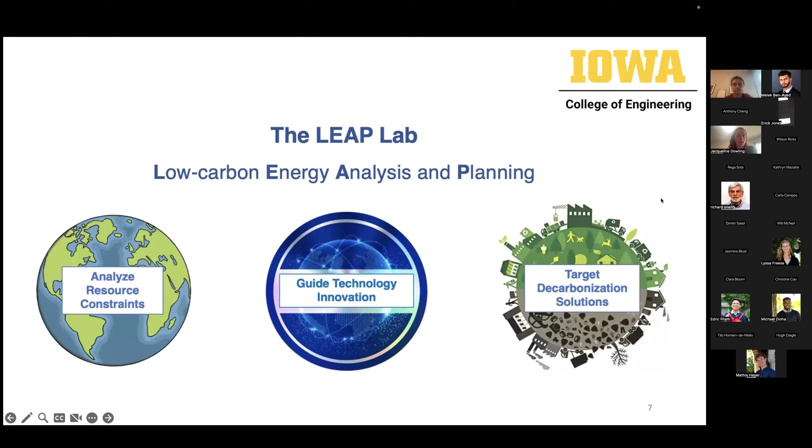I just like to say that I grew up in Iowa and I found my way back to Iowa after 10 years in California, and I'm really happy to be here at Iowa. So I lead the LEAP lab on low carbon energy analysis and planning, where we analyze natural resource constraints, guide technology innovation, and target decarbonization solutions. We've got a couple grad students joining, and if you're interested in the future, let me know.

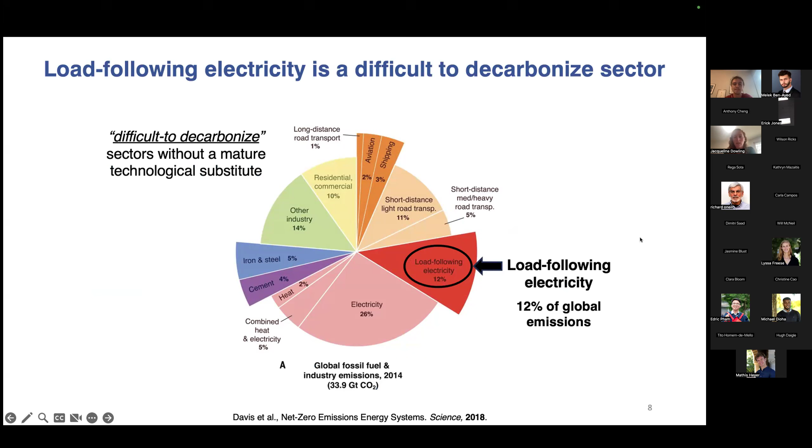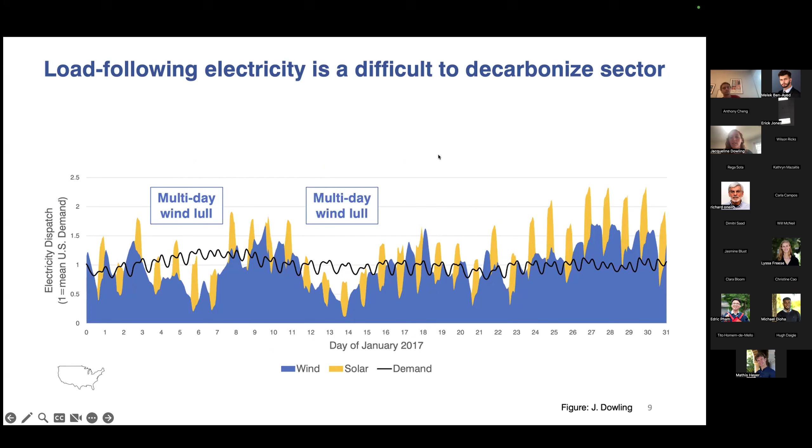So, load following electricity is a difficult to decarbonize sector, and it represents about 12% of global emissions, and it's kind of the focus of my talk today. Here I am showing wind, solar, and demand data for average across the continental US. And right away, you can see these two multi-day wind lulls, which are a challenge. But these wind and solar constraints give rise to opportunities for energy storage technologies such as multi-day energy storage to fill in for these multi-day wind lulls.

Additionally, you can have curtailed or wasted electricity beyond demand. And interestingly, this gives rise to opportunities for low efficiency energy storage to potentially soak up that need if it's cheap enough. So various wind and solar constraints include extreme weather years, droughts and seasonal lulls, and curtailed or wasted electricity. But these give rise to energy storage opportunities, such as multi-year and seasonal storage functional roles, large volumes of low-cost energy storage, and opportunities for low efficiency energy storage if it's low enough cost. I've published in all of these areas, but today I'll focus primarily on the energy storage story.

I want to say that various technology options may provide load following electricity. We'll hear from Wilson next about geothermal, which is a source of clean, firm power. Sector coupling can also help with load following electricity. But today we'll talk about long duration energy storage as one option from a menu of options.

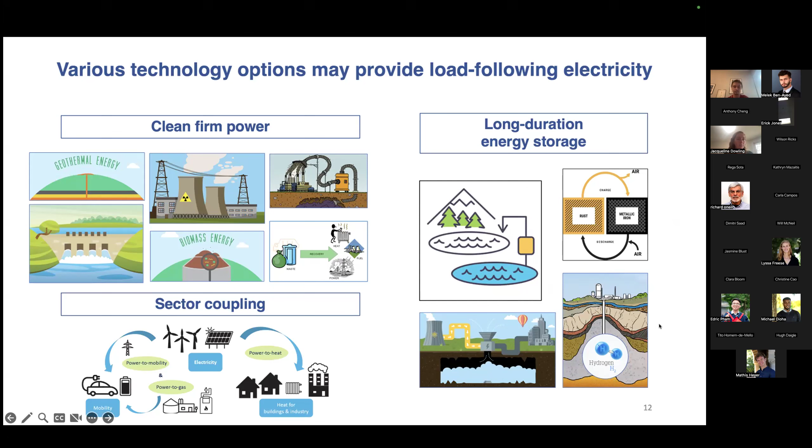I'm showing examples of long duration energy storage here, which include an iron air battery, like Form Energy's. There's compressed air energy storage, pumped hydro, and underground hydrogen storage as well. So we asked, at current technology cost, would long duration energy storage reduce the cost of reliable wind solar battery systems?

One example of long duration energy storage, as I mentioned, is underground hydrogen storage, where you can take excess wind and solar electricity, use it to split water into hydrogen and oxygen, store the hydrogen underground, and recombine it with oxygen in a fuel cell to meet electricity on demand. These two energy storage technologies both have charge steps, storage steps, and discharge steps, but importantly, they have opposite complementary cost structures,

where the long duration energy storage technologies typically have very low energy storage costs in this middle column, but higher charging and discharging costs. Just for comparison, lithium ion batteries are projected to get lower in 2050, but not orders of magnitude lower. This cost of $2 a kilowatt hour is far lower than the predicted 2050 costs of lithium ion batteries. And these costs are really what drive our results.

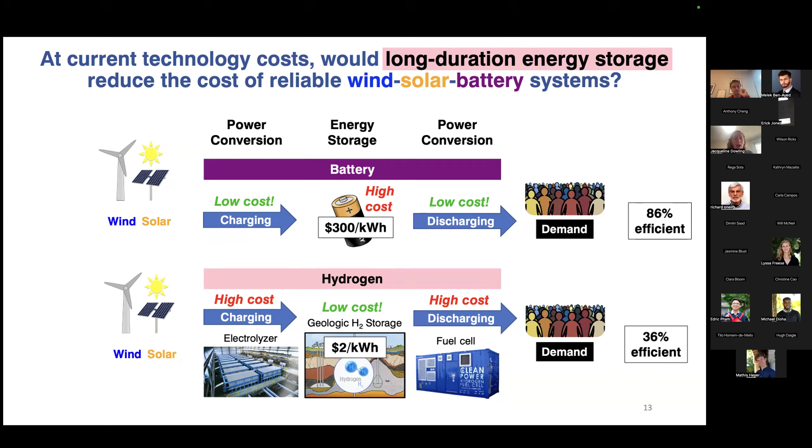Our priors going into this study were not that this underground hydrogen storage technology would be cost effective, because we saw the high charging and discharging costs, and we also saw the very low round trip efficiency, so we did not expect it to be present in the least cost system. However, we found it was. And it was primarily because of that very low energy storage capacity cost.

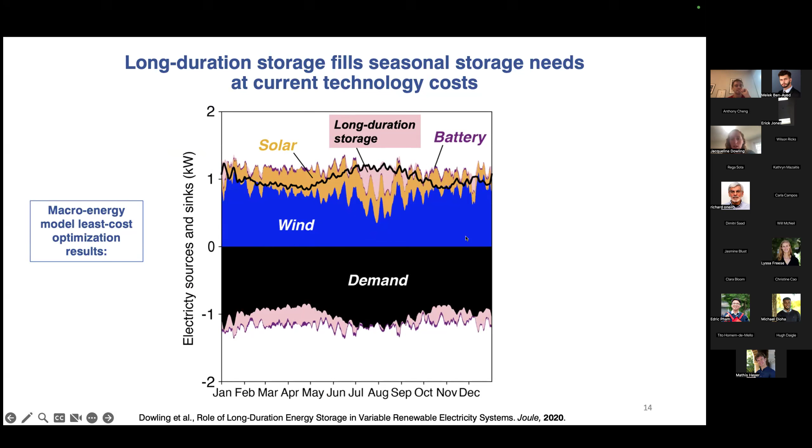So here you can see the excess wind and solar beyond demand charging up storage, and then discharging during a summertime lull in wind and solar. So this is a seasonal lull that the energy storage is filling in for there.

Additionally, we considered multi-decadal weather data sets because we wanted to understand the value of seasonal energy storage. And in order to understand the value of seasonal energy storage, you have to look at multiple seasons of weather data. That was typically not done by utilities and regulators, and so that was new. We looked at 1 year, 3 year, and 6 year horizons, and we found that reliable systems that plan for more years increasingly depend on long duration energy storage.

So here you can see the max storage capacity was about 10 days of mean US demand when solving the model for a single year, compared to closer to a month. Additionally, you can see multi-year energy storage being valuable, where energy storage is built up here over 3 years and then depleted during a scarce, stressful event later on.

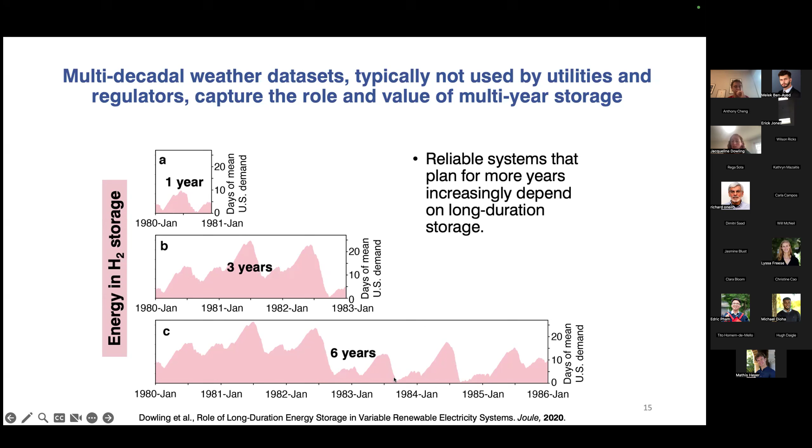So the key research advance here was twofold: we used multi-decadal weather data and we modeled an emerging technology. This paper is mainly cited for the simple fact that long duration energy storage can reduce the cost of reliable wind solar battery systems, and we bound that system by saying wind solar battery systems. It was cited in policy by Canadian and Australian governments, and that was really cool to see the work move from academia to practice.

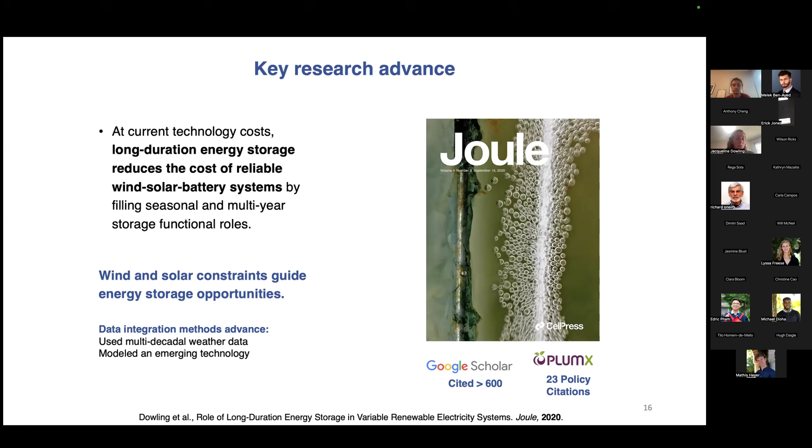Additionally, we looked at other energy storage options: redox flow batteries, pumped hydro, gravity storage, thermal compressed air energy storage, metal air batteries. And we found that geologic hydrogen storage and metal air batteries were the most cost-effective energy storage technologies, again, because of those really low energy capacity costs. So don't think of me as a hydrogen person. Think of me as someone who's focused on low energy storage capacity costs. Yeah.

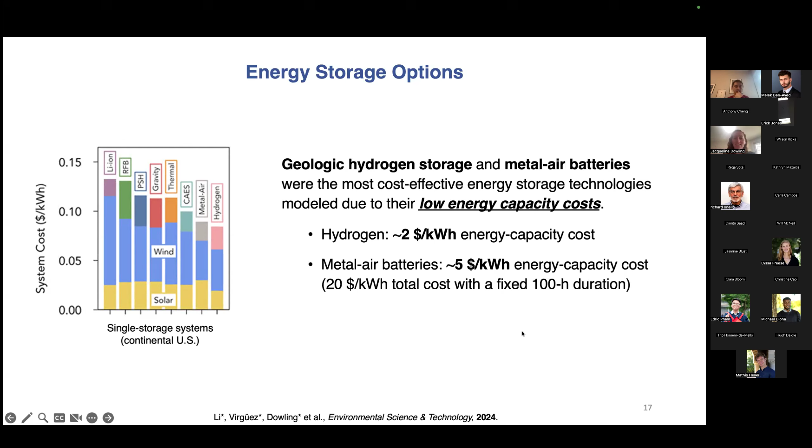But we did consider underground hydrogen storage in more detail because it is a promising example of long duration energy storage, and we looked at underground storage constraints specifically from natural gas infrastructure. We found that if you were to repurpose about half of the available natural gas storage facilities for pure hydrogen, that would be enough for national scale seasonal energy storage in some of our models. So there's ample capacity in existing natural gas infrastructure.

Additionally, you might be saying, well, all of your results are only looking at wind solar storage systems, and emissions are not allowed. But here we looked at systems where natural gas was allowed, but then it was increasingly constrained at different time periods or over time. And we found that underground hydrogen storage can reduce electricity costs in wind and solar systems when natural gas is restricted to about 17% of demand.

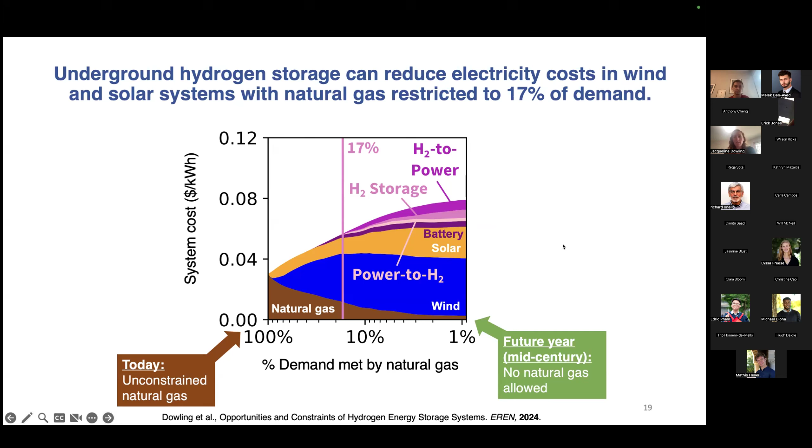So this means that long duration energy storage is really a deep decarbonization technology, and it's not competitive today while natural gas or other dispatchable sources of electricity are not constrained. So it's a deep decarbonization solution.

Next, we looked at the value of different innovations in underground hydrogen storage, including the value of capital cost improvements compared to the value of efficiency improvements. And we found that if you took our base case and looked at a theoretical improvement of round trip efficiency from today to 100%, the system cost would only decrease by about 7%. Whereas if capital costs were to be minimized all the way to zero, then system costs would decrease by 35%. So we found in this system that capital cost improvements were more valuable than efficiency improvements.

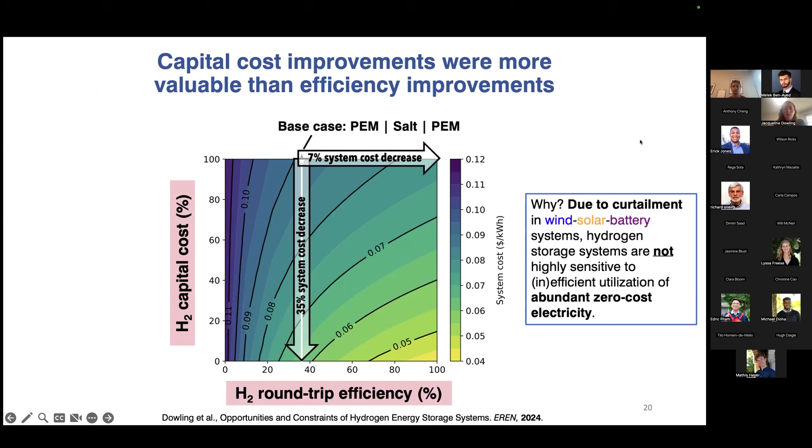And that's because we were looking at a wind solar battery system with a lot of curtailment. And the storage systems were not highly sensitive to inefficient utilization of abundant zero cost electricity. So that was the specific system we were looking at.

Additionally, we've looked at dirt cheap energy storage, thermal energy storage in dirt, which uses soil or rock to store energy at very, very low capital costs of 1 cent a kilowatt hour. So I mentioned $2 a kilowatt hour for underground hydrogen storage, about 5 to 10 to 20 for iron air batteries, and then lithium ion was on the order of 200 or $300 a kilowatt hour. This is so cheap in comparison.

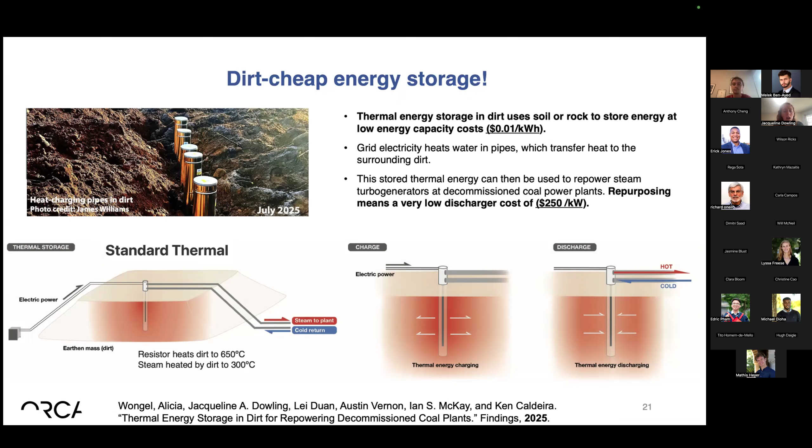And additionally, we considered thermal energy storage at decommissioned coal plants where you can repower the steam turbo generators. And this repurposing means that you can also take advantage of a very low discharger cost of about $250 a kilowatt. And that makes this energy storage technology incredibly cost effective. We found that it was competitive even without an emissions constraint in a wind, solar, gas storage, and oil system across the continental US.

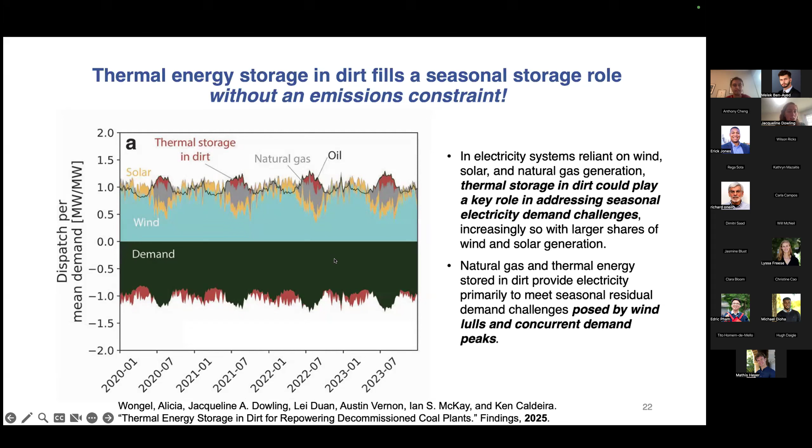So you can see that the thermal energy storage in dirt is not replacing all of the natural gas, but it's filling this seasonal energy storage role and meeting these challenging times where there are both wind lulls and demand peaks in those summer times. Yeah.

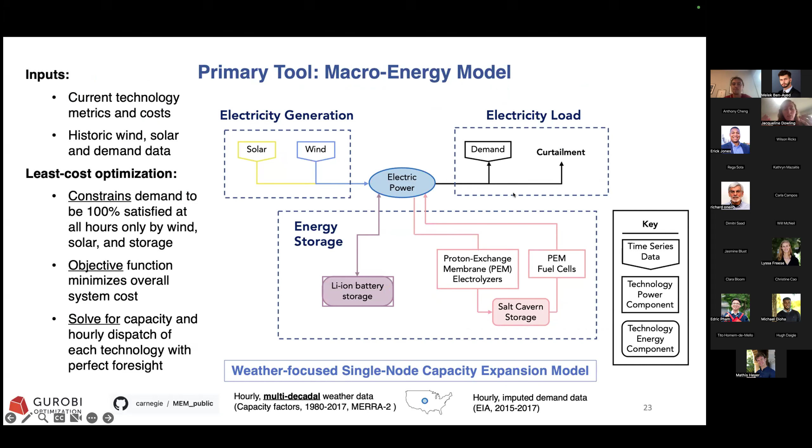So the primary tool that I have been using to discuss the previous papers that I mentioned is this macro energy model, which is a weather-focused single node capacity expansion model that is really useful for considering multiple decades of weather data. But now we're looking at multinodal sector-coupled modeling with spatial resolution in PyPSA-USA that's been developed at Stanford by Kamran and Trevor Barnes.

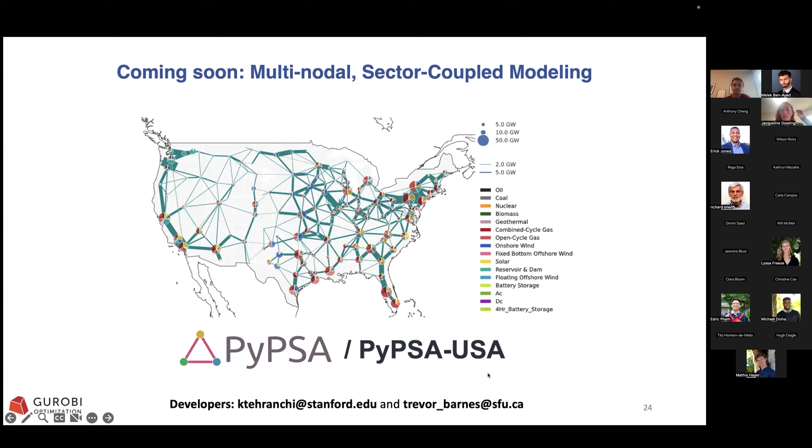And the first paper that I'm using PyPSA-USA to look at is asking this question of, is hydrogen still valuable for long duration energy storage in sector coupled energy systems? And what we found is that huge underground hydrogen storage was still valuable, but instead of hydrogen getting re-electrified in the power sector, hydrogen was more valuable as a chemical feedstock.

So here you can see we still have a large hydrogen storage capacity in these sector coupled systems, but the capacity of either fuel cells or hydrogen turbines were much lower in the sector coupled system. And this work is in collaboration with folks at University of Michigan.

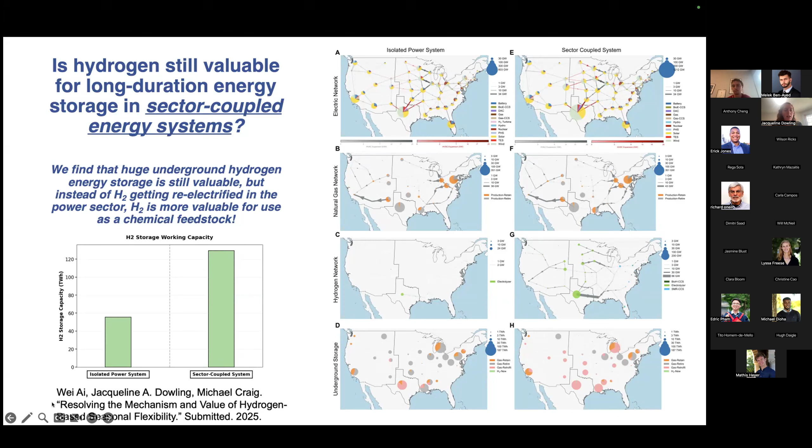So yeah, today I've talked to you about how wind and solar constraints guide energy storage opportunities, specifically for long duration energy storage. I talked about the wind and solar droughts and the seasonal lulls that are these resource constraints. And we talked about guiding technology innovation and different energy storage technologies and which types of innovation are most valuable for reducing overall energy system costs.

And additionally, we discussed repurposing infrastructure for... It's what, 9:30, I'm already playing video games. Oh, that'd be too much. I think somebody unmuted. Oh, sorry.

Okay, yeah. And finally, we looked at repurposing infrastructure for decarbonization solutions, including using these natural gas underground storage sites for hydrogen, and also repurposing decommissioned coal steam turbo generators for thermal energy storage.

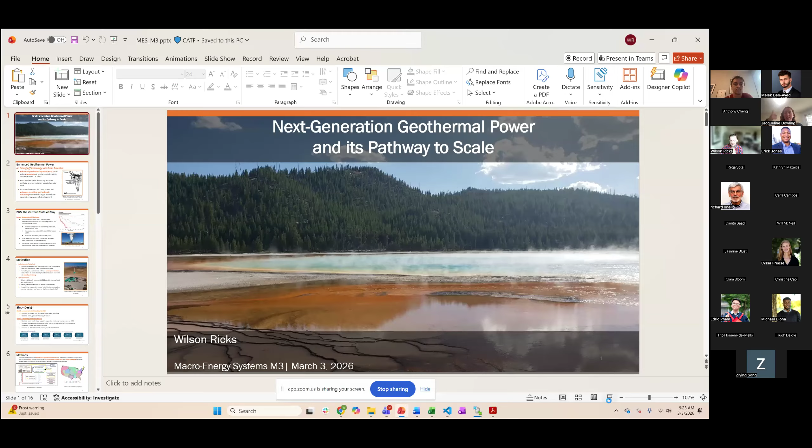We might be having trouble here. Let me see if I can find my... Oh, if you're having trouble, Nils could go next potentially too. So whichever you... Let me give this a shot. Okay, Wilson. Try sharing my entire screen. Okay, nice. You got it. Can everyone see this presentation in presentation mode? Yes. It looks excellent. Okay.

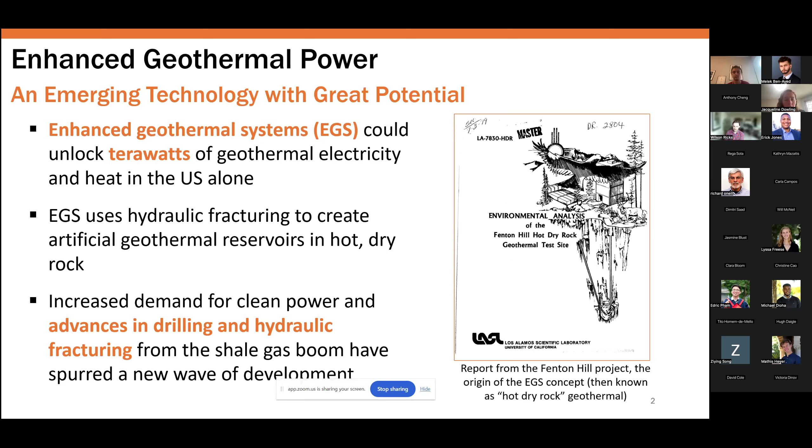And there's been interest in EGS power for a good 50 years now, going back to the 1970s, the Fenton Hill project. But recent advancements in things like directional drilling technology and hydraulic fracturing, which actually came out of the shale oil and gas boom, have really spurred a new wave of enhanced geothermal development interest. And it seems like this technology is much closer to prime time than it ever has been. If we look at the current state of EGS development, there have been a few major technical milestones in the last few years alone. Especially since I started working on this back in 2020, there's been really incredible progress.

The first really large-scale modern EGS demonstration came with a pilot project by Fervo Energy, which is kind of the leading private EGS developer right now, in Nevada in 2023. That was only a 3 megawatt project. There was also a successful flow test at the Department of Energy's demonstration project in Utah, which is more of a science facility than a really commercial scale generating facility.

And more recently, Fervo, right next to the DOE's Forge site in Utah, published results from a 10 megawatt flow test of a well there, and they claim to be bringing online up to 100 megawatts of enhanced geothermal power at that site by the end of this year, with a target of 500 megawatts by 2029, and PPAs signed for that. So this is a technology that, again, 5 years ago was largely theoretical and now seems much farther along the road to prime time and demonstration and commercial availability.

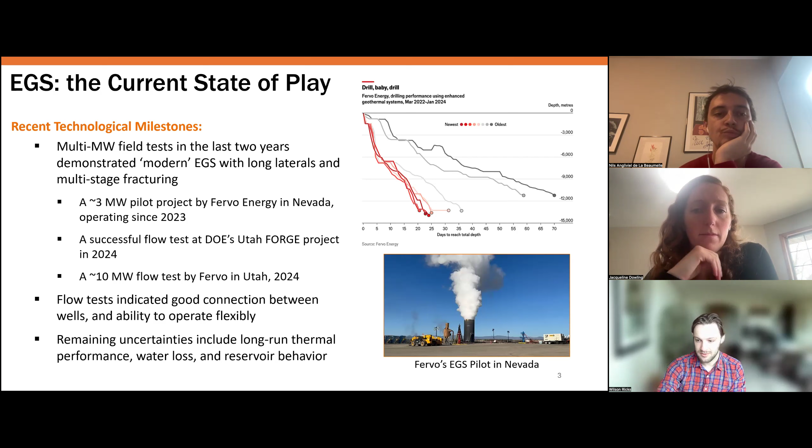And so when I was in the process of planning this work, I think there were a few things that we had in mind. One was, of course, this reality of major advancements on the ground, and the first real pieces of field data that we had on this technology, so we could stop being, maybe be a little bit less speculative about what its cost and performance would be.

At the same time, of course, the expectation of growing pains, that this is a technology that is really just taking its first baby steps on the commercial stage, and that past studies, which I and others had done, examining the role of EGS, its potential in future electricity systems, really looked out to, say, 2050 and assumed availability of this technology at competitive cost and commercial scale.

And of course, in reality, as a nascent technology, it's going to face scale-up constraints. It's probably going to see its costs start higher and come down over time via economies of scale, workforce scale-up, learning by doing. We see this phenomenon with all sorts of emerging technologies in energy and elsewhere.

And so there were a few key open questions that I wanted to look at, like where and when might early commercial EGS become cost effective, become commercially competitive? And then how would the scale and timing of those initial deployments affect its learning trajectory and its long run deployment potential? And ultimately, what is a realistic long run potential for enhanced geothermal power over the next, say, 3 decades?

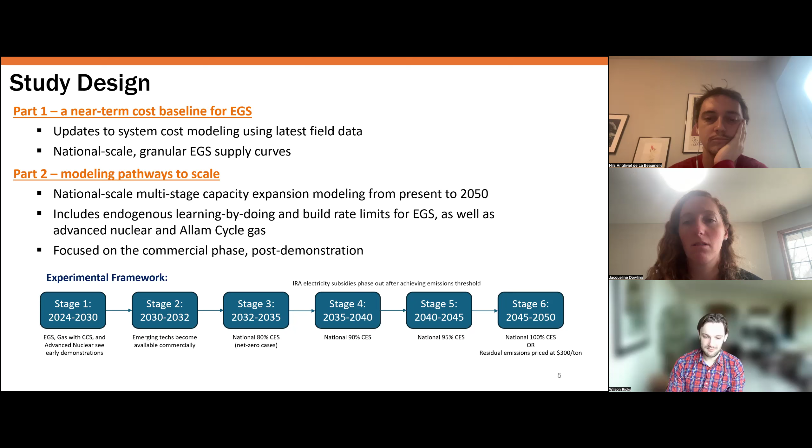And so, just to caveat, this is a challenge of doing anything resembling a projection in energy system modeling. Policy can change under our feet, but I think it's also a lesson in how to try to keep your results as useful as possible, model as many scenarios as possible. It turns out that reality probably looks something like our current policy scenario, at least from the perspective of geothermal power, given that subsidies for that technology have been retained.

In terms of the approach, this is, of course, using a national scale electricity system model, 15 zones with fairly high temporal resolution, scaling down the geographic resolution to accommodate the flexible geothermal optimization submodule that we developed in prior work, which represents the ability of enhanced geothermal systems to actually modulate their power production and make more efficient use of the heat resource, which is a limited resource, and also make efficient use of the power used to pump water through the system, which can be shifted in time by storing pressure in the reservoir.

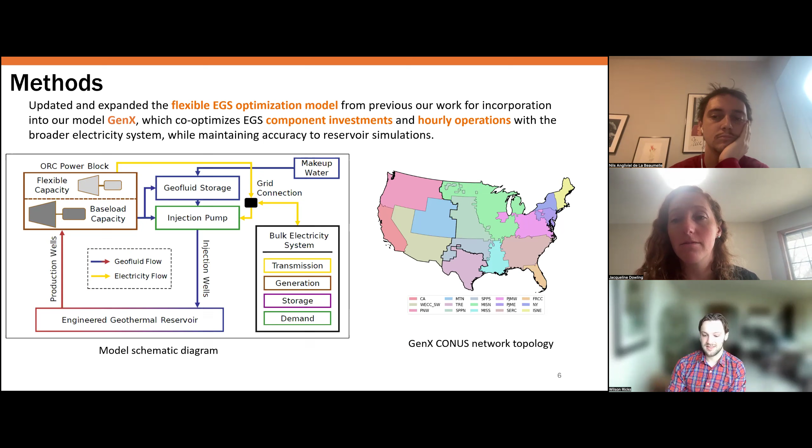And this is something we'd investigated in pretty high detail in prior work, and incorporated into this as a key capability of enhanced geothermal power.

We developed national scale supply curves for enhanced geothermal. It's not a uniform resource by any stretch. It's highly geographically variable. And so to model it effectively, you do really need to be using temperature at depth maps and data sets that reflect that in some regions it's much more easily accessible at lower depths and lower costs. And we also simulated the operations of an enhanced geothermal system using an assumed reservoir design. This is on the left, and based the cost baseline on an assumed initial reservoir design. So very much ground up.

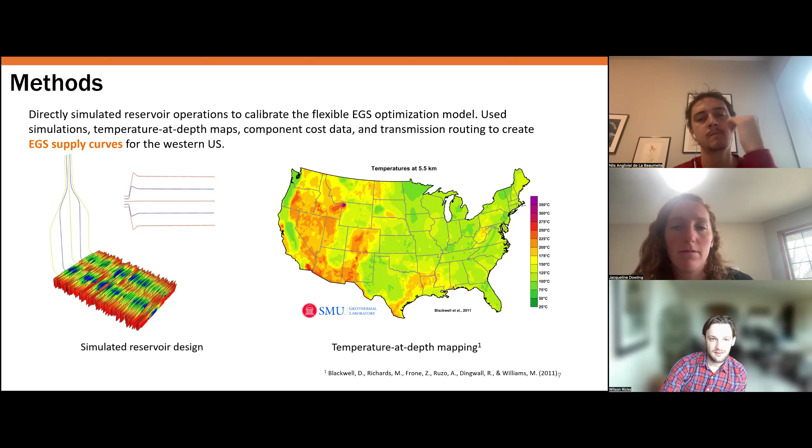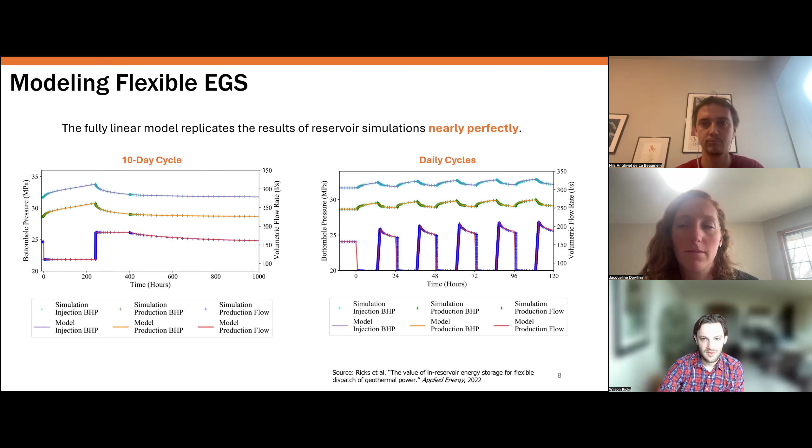Moving on to results, I want to start with just the cost baseline we built. This, again, is based on as much of the published data from these demonstration projects as we could access publicly. And of course, there's a pretty high range of bounds, but the general conclusion is that within uncertainty bounds, outside of the Western interconnection of the US, where the best quality resources are, EGS is almost certainly not going to be initially cost competitive.

And that makes sense. You have to drill very deep east of the Mississippi to access high enough temperatures. Within the Western interconnection, it's another question. And specifically at what we call near field sites, these are areas close to existing known conventional geothermal systems where you have hot water kind of welling up and bringing heat to shallower depths than you'd find it normally. In the areas around those systems, you can find near field enhanced geothermal potential that is really quite promising from an early commercial perspective, and is likely where we'd see initial deployment. And it's much, much cheaper than the deep baseline.

And again, here's an example of just commercially developable sites at different depths. You have to be above 150 Celsius to be developable at all. In the left plot, we only see those labeled sites, which are the near field sites, having some capacity, and it's still fairly large capacity potential. And then at 6.5 kilometers on the right, you see much wider potential. On that map alone, that's probably multiple terawatts. And you still have those same near field sites, but you can go almost anywhere in most regions.

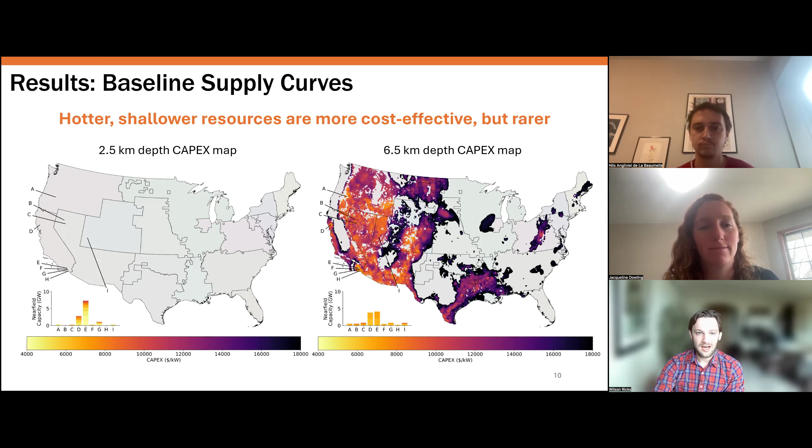And that provides the jumping off point: if your costs come down over time via learning, those cost reductions allow you to move up the supply curve into the lower quality resources while remaining cost competitive. And this provides a runway to get to commercial scale, which is something that wind and solar have both benefited from. There are certain sites that have much higher resource quality than others, like the Midwest for wind or the Southwest for solar. The same is true for geothermal.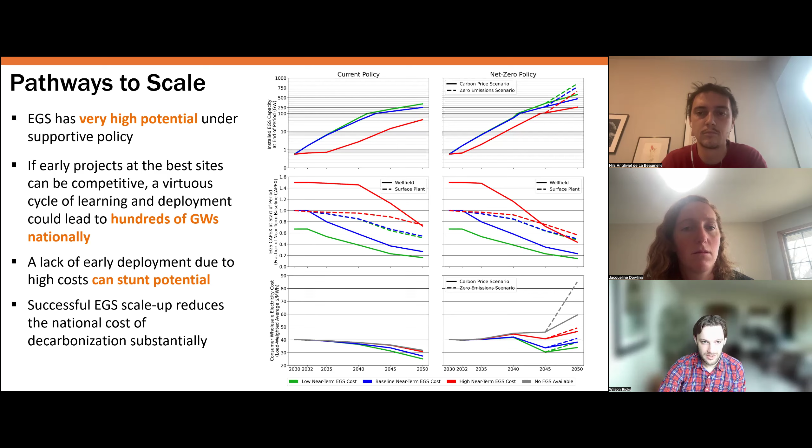What's interesting is that in scenarios where we assume just baseline EGS costs and a learning rate equal to our baseline assumption of roughly 15%, which is very similar to what was observed in the shale oil and gas industry, we see EGS eventually becoming a national scale resource, actually not even limited to the Western interconnection.

And what's interesting here is that with learning-based cost reductions, despite the fact that there's still a very large difference in resource potential from west to east, the magnitude of that difference becomes lower as the magnitude of the overall cost becomes lower. So instead of $200 a megawatt hour versus 100, it's now 50 versus 100, and it's only a 50 difference. And so we actually end up seeing quite a bit of development in the eastern half of the country being plausible.

And just back to what I noted earlier, there are significant uncertainties in the actual resource, the temperature at depth mappings. On the right here are results downscaled to the actual sites of individual project deployment for two temperature depth mappings. The top one was from Southern Methodist University. It was the only existing mapping for a long time. And then the bottom one is a more recent mapping out of Stanford by Mohammed Aljubran and Roland Horne.

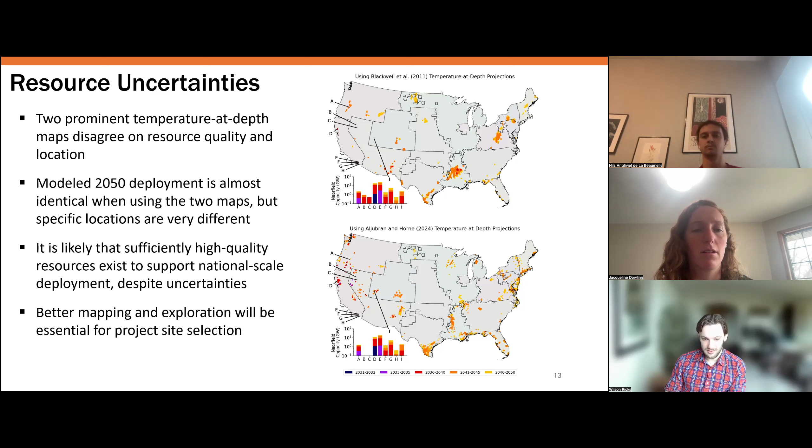And the conclusion here is that sufficiently high quality resources probably exist to support national scale deployment, despite the uncertainties in where they are. But practically, we really need to know where the best sites are to actually realize this potential. And so, there's a lot of disagreement in the data we have right now. And so better mapping and exploration are going to be absolutely critical to unlocking very large scale geothermal deployment.

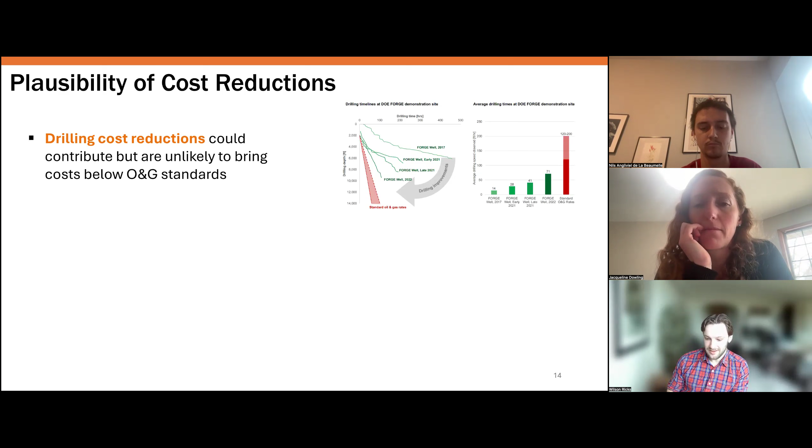On the other hand, just like in the shale industry, we could expect most of the cost reductions that we observe in the model learning to come through improvements in the actual design of the artificial reservoir. So increasing the number of lateral wells, adding more vertical layers of laterals, increasing their length. These are all approaches to maximizing the amount of flow you can get while minimizing the amount of drilling you have to do.

So your drilling isn't necessarily cheaper, but you're getting more water out per well and accessing more rock per well. And if you add up all these, I think fairly plausible, developments, you get to a very high level of cost reduction that is similar to what we observe in our cases where we see very steep learning. And so there are plausible pathways here, though, of course, real world validation is very much needed.

And I'll just conclude by saying that, again, these results are showing that EGS could very plausibly, at current estimated performance, grow to become a very large source of carbon-free generation if we can manage to achieve large-scale deployment in the next decade. If it can meet that target and benefit from those cost reductions, the resource is sufficient to actually act as a clean, firm power resource across most of the continental US, which was not my prior expectation going into this study.

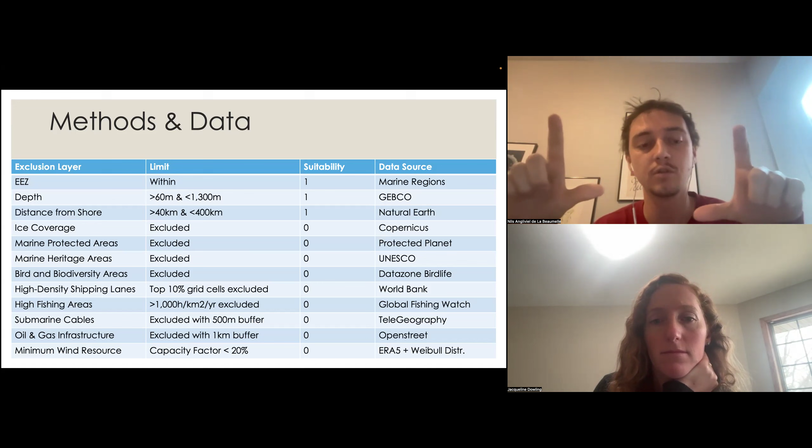What I meant by exclusion layers and how to determine the suitable area is you have to apply all of these constraints. So for offshore wind, obviously you first start with bodies of water, oceans mostly, in some places lakes, like in the Midwest, you could look at the Great Lakes. But then we're looking only at exclusive economic zones. We don't consider that you could deploy floating offshore wind in international waters, it would be too complicated legally.

Then you have to apply some depth and distance from shore constraints. Since we're looking at floating offshore wind, we don't look at any areas below 60 meters depth because that's where you would have fixed bottom offshore wind, the other more mature technology that taps the offshore wind resource. And then we're applying a depth limit of 1,300 meters, which is broadly accepted in the industry as feasible. A lot of people say you could actually go deeper, but this is what we're using for now. You also don't want the turbines too close to shore, nor too far. It wouldn't make any sense.

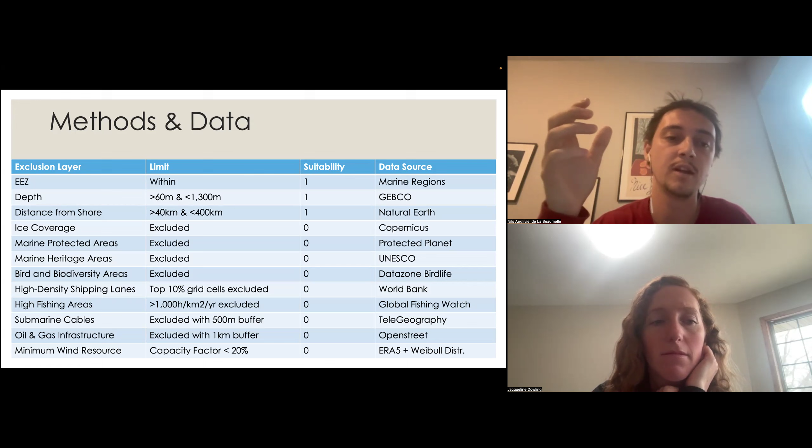And then you exclude a lot of areas. We excluded any area that freezes sometimes. There are some technologies that could handle that, but for now, we're just excluding them. We're excluding marine protected areas, heritage areas, bird and biodiversity areas. And we also take into account some other human infrastructures and activities such as shipping lanes, fishing areas, submarine cables, oil and gas infrastructures. All of that is included in our analysis and excluded from where you could deploy offshore wind.

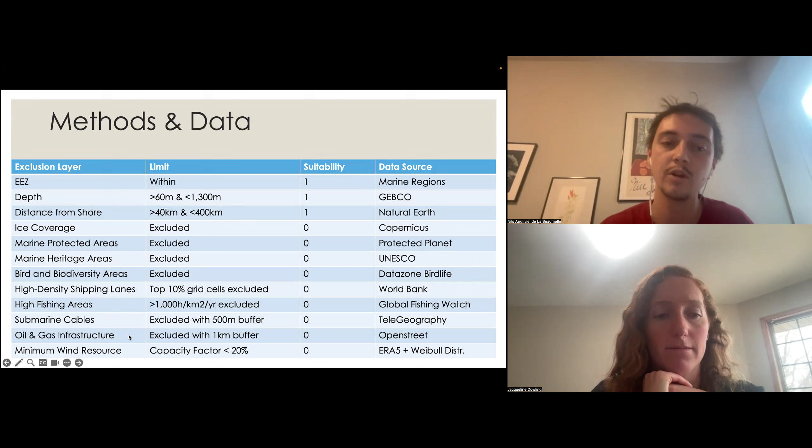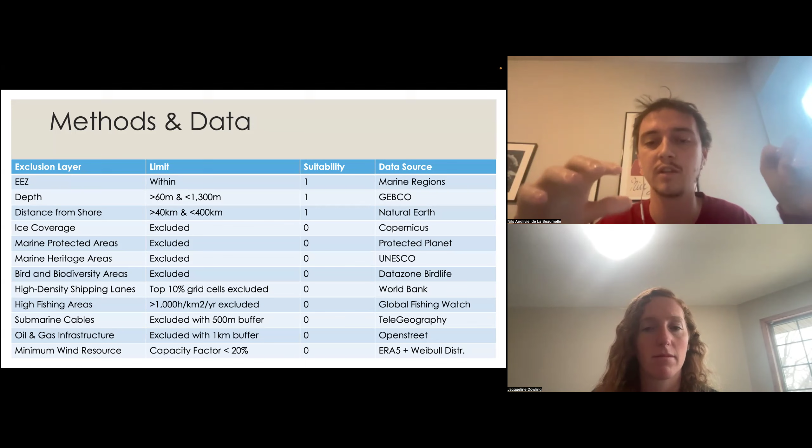In the technical potential, technically, you have those suitable areas. You just look at how much energy could be produced in those areas. We're also applying a threshold, since you actually need decent resource, and we're removing areas with capacity factors below 20%, which would be very low for offshore wind. So yeah, we're just removing these as well.

And then once you have this and you have all of the green areas where you know you could have offshore wind, you use the wind speeds from ERA5 that I was talking about earlier, turn it into energy production based on the actual area of the grid cell, which gives you the total capacity of offshore wind that could be in each of these grid cells. So you end up with a total energy production per grid cell.

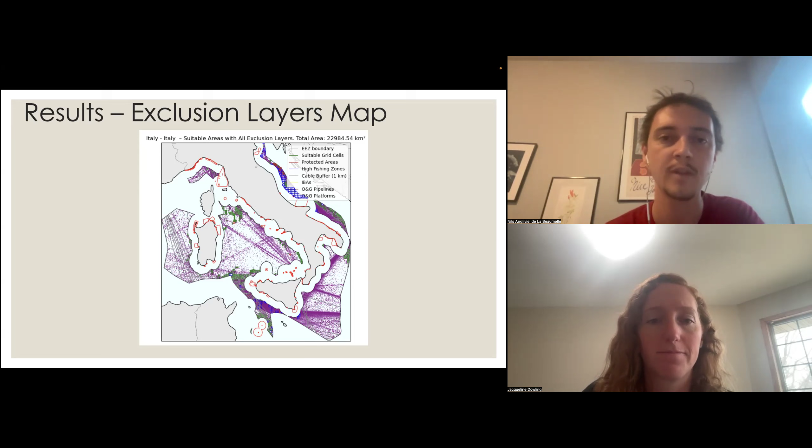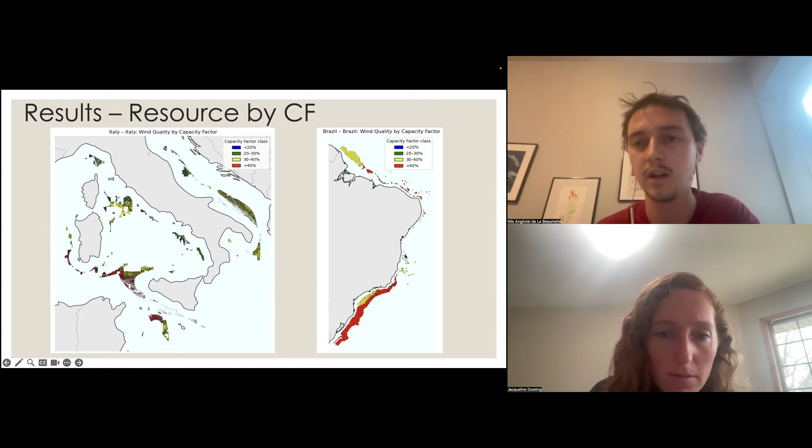What you're seeing here is the potential based on the capacity factor class, which is just to have a visualization of how much of the resource is being subtracted because of this capacity factor threshold that I talked about earlier. In almost all of the countries that I've run so far, it's very little. As I mentioned, 20% is a very low capacity factor for offshore wind, which is usually much higher, around 30 to 55%. So we can see here in Italy, a lot of it is between 30 and above 40. And for example, in Brazil on the right, it's very high.

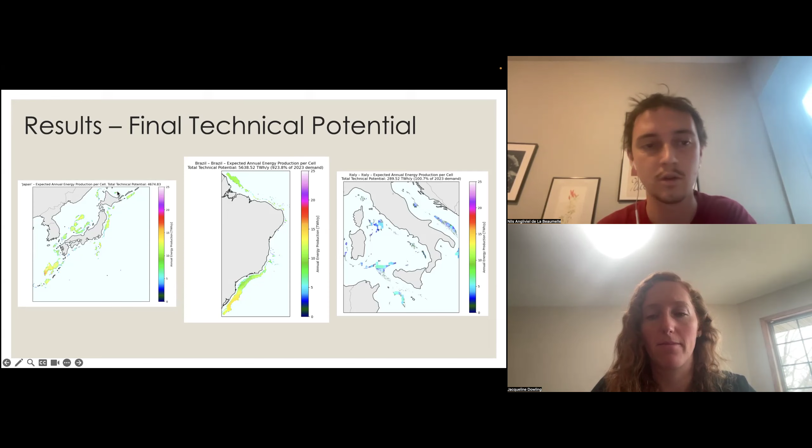And one thing that I'm showing as well in these maps is I look at the 2023 electricity demand from the EIA, or anyway, I forget which exact source I'm looking at, but one of the major international ones. And I'm comparing this potential to the electricity demand in each of these countries. And in a lot of these countries, you see that it's huge. Like in Brazil, it's 10 times the electricity demand. In Italy, even if it doesn't look that great, it's still equal to the total demand. So these countries all have huge technical potentials. Japan doesn't have it because this is an earlier version of my code.

Yeah, so this is what it looks like, and I just wanted to briefly talk about some of the novelties of this, since as I said, these are common methods. First, we updated technological parameters which hadn't been done in a long time on a global scale. The turbines used to be assumed to be much smaller, but the industry has grown super fast and is expected to keep growing. So this has been updated, which of course means the hub height is also updated, and usually means faster winds, better resource. The depth limit also used to be much lower in previous papers, and we're increasing that. Only a few were using 1,000 meters.

And we also include more exclusion layers. A lot of the human activities were not really included in global analyses, partially because some of the data was not available at the time. And we actually found that some of these are really important, and we're going to run sensitivities on them. And the few next steps that I haven't finished for the technical potential are including military zones and nuclear waste disposal sites. But a lot of this data is not really available globally. And as I said, running a lot of sensitivities. I'll come back to it in a second.

I just want to briefly talk about the future work, which is more innovative and novel. And it's just going to take me a minute. I'll be quick. The economic potential, as I mentioned, is still something that has been used. You just take the total capacity in each of these grid cells, calculate the cost, and divide by the production in that grid cell. And it gives you an LCOE for each of these grid cells. I also want to look at the levelized cost of transmission, trying to determine how you could connect these grid cells to the existing grid and potentially demand centers like cities.